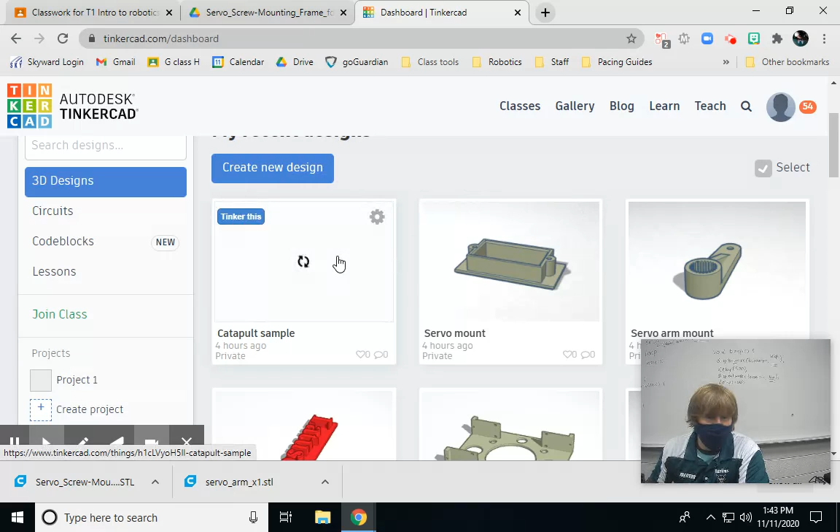I'm going to create a new design, and this is the catapult sample of what we're eventually going for, if it'll ever load. Okay, but it's not going to load, so I'll just show you what we're doing now. Oh, there you go. So, creating a new design.

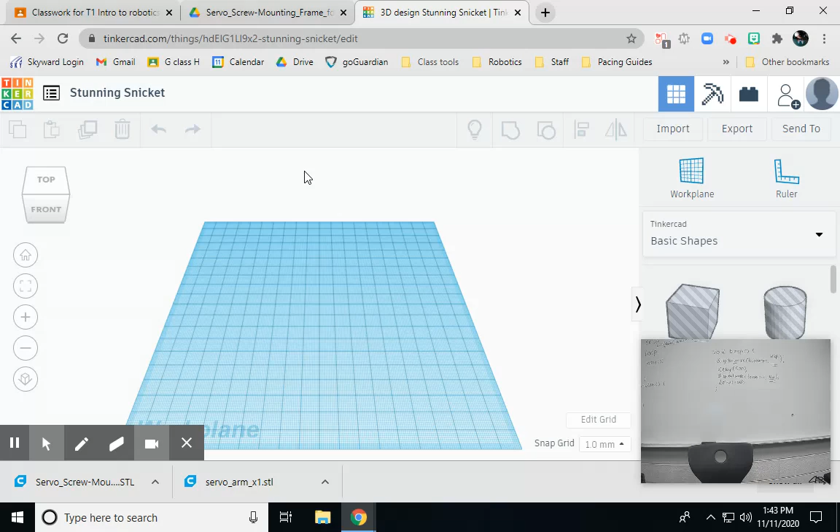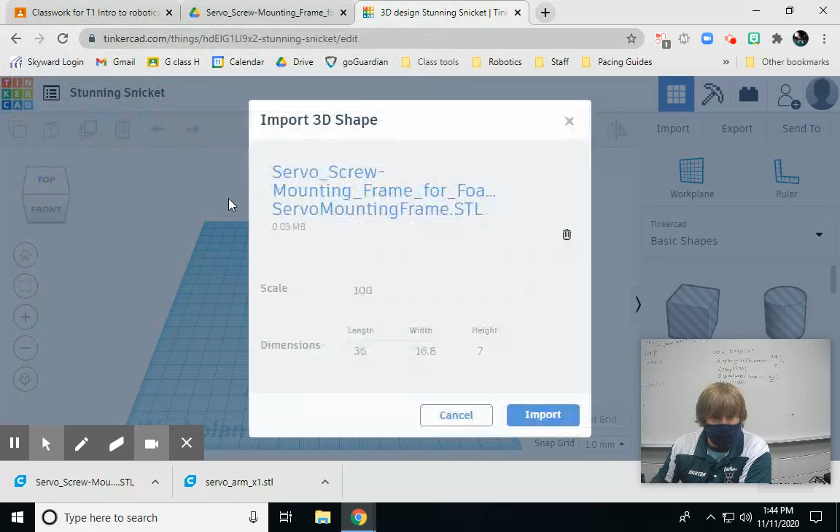What I'm going to do is go up to the top here where it says Import 3D Files. I'm going to choose a file here, and I've got two things: the servo arm and the servo screw mounting. So I want to insert the servo screw mounting first. I'm going to import this.

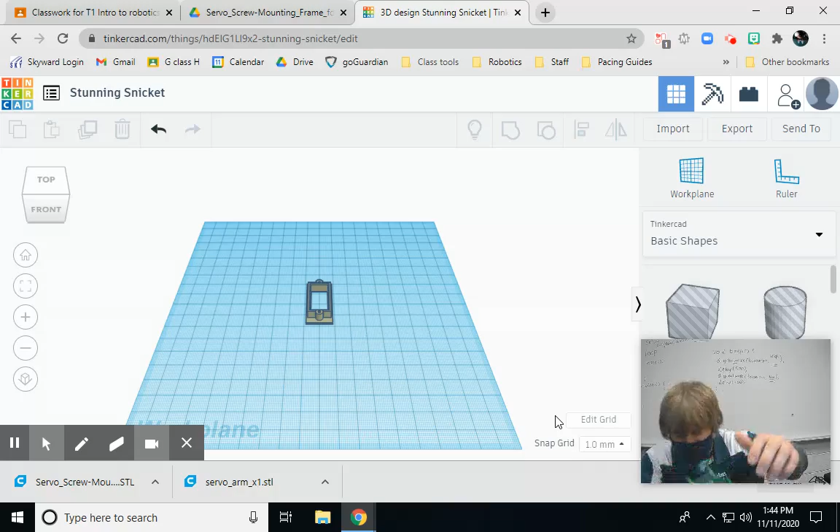What this is, is the mount for your—what do I want to call it—the servo motor. So just like in your robot, how there are little spots where you mount these servo motors, it's got a special screw for it. This mount is where you would put the servo into. So those are the screw holes, and this is where that would come out. Now, keep in mind...

Where's a good spot where you can see it? Mr. Latuzik, if you were better prepared, but you're not.

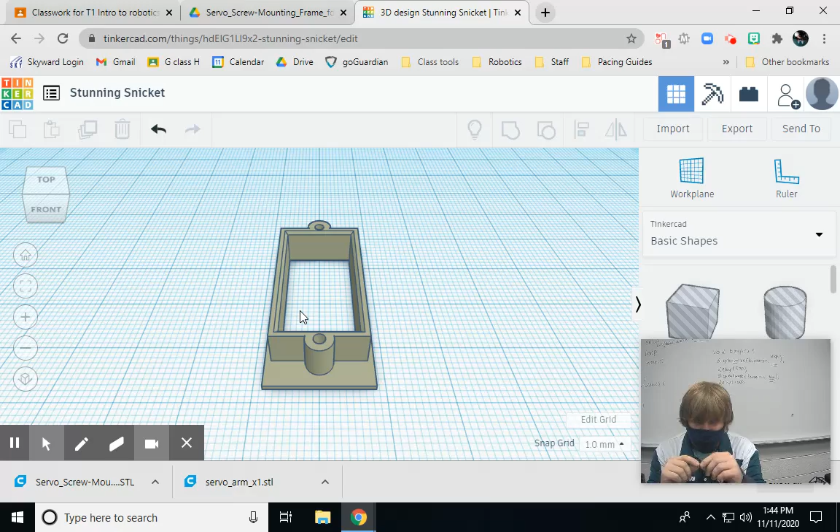All right, so the servo has the little horn that comes out, and what we want is for our catapult to sit on a flat base here, and then we'll have a servo motor sticking upright, and it's going to swing an arm that goes back and forth. So as it winds back, we could load it, and then when it shoots forward, it would throw the object.

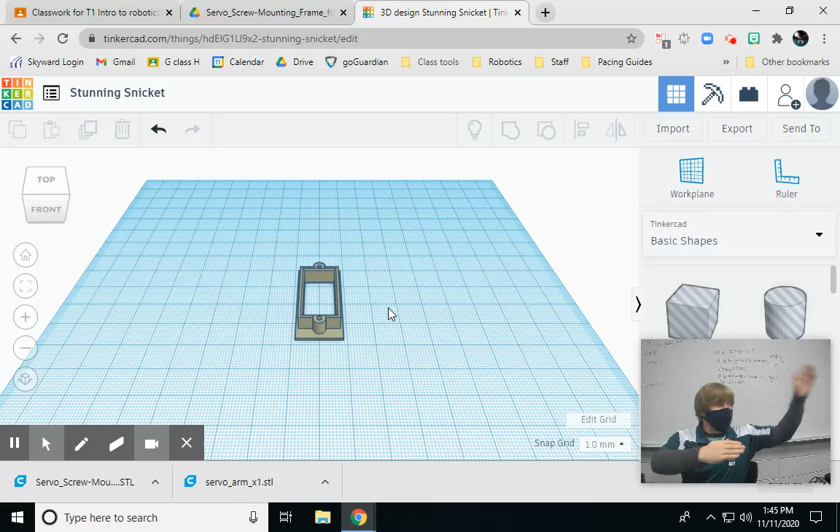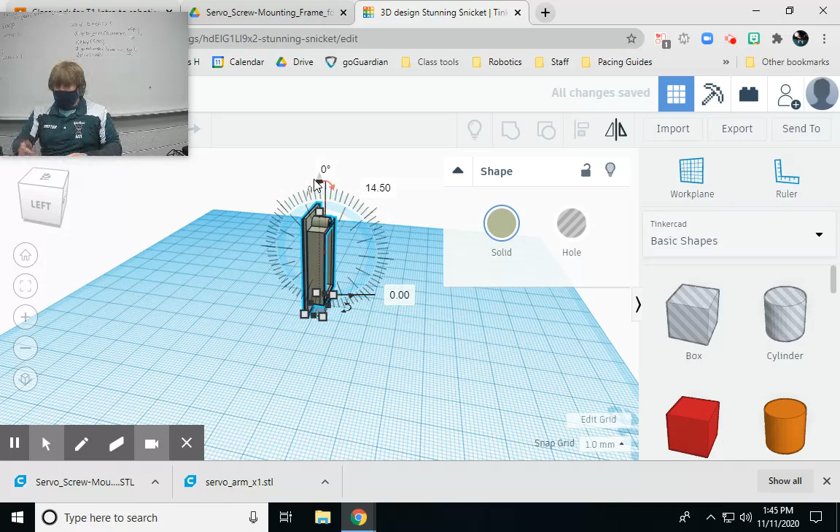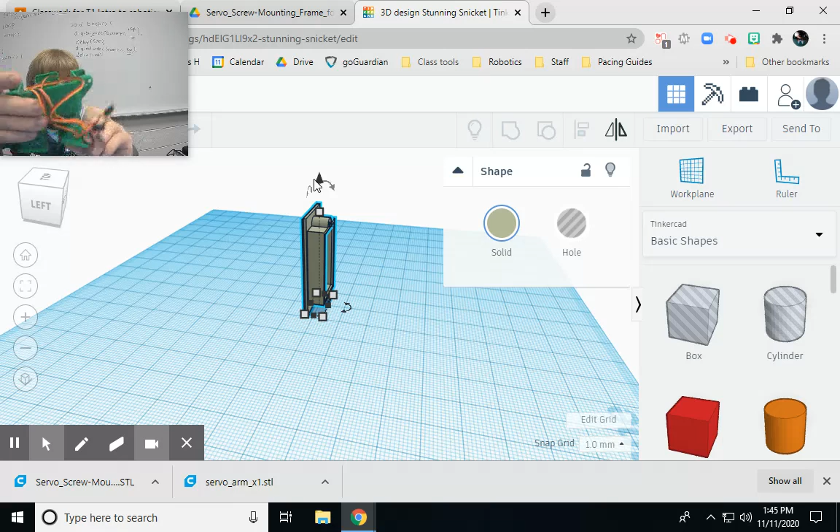Just like in the robot foot, how this motor turns side to side—well, it should, it shouldn't crack like that. This one does better, it turns like this. So that's when the motor is upright.

And instead of having it connect to a foot, we'll have it connect to a long arm that would throw. That's the idea, we'll see how this works. Again, this is experimental here.

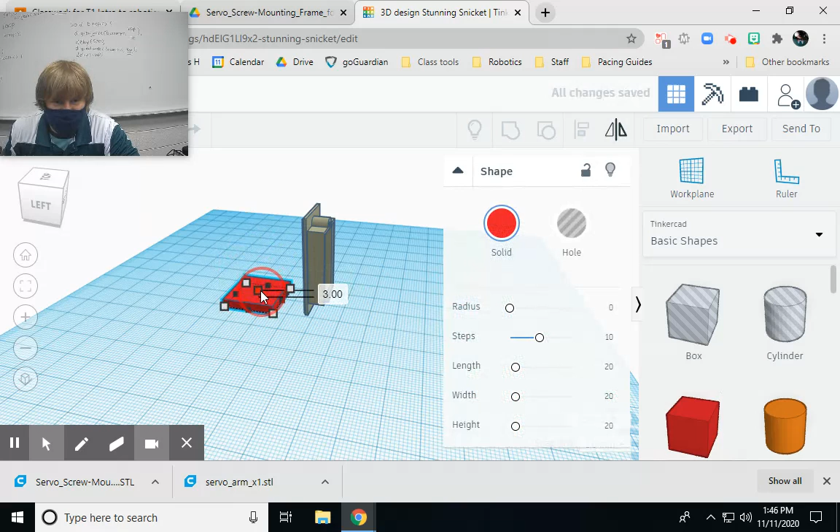So I'm going to drop in a box because I need a base. I'm going to drop that down, maybe only like 3 or so—again, it's kind of however you feel about it. And what this can be, if I hold this down with my finger, I want to keep this as small as I can. So I'm going to hold this base down, and then the arm would have to swing while I'm holding it. The smaller it is, the less filament I use, the quicker we can print this out.

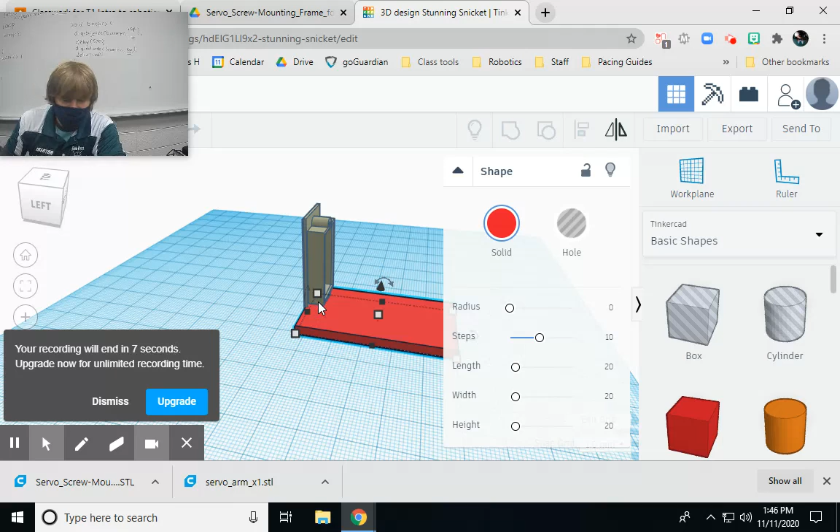So far I've got a box. This is where my servo would mount onto, so the motor would go here, and then this would be the area.